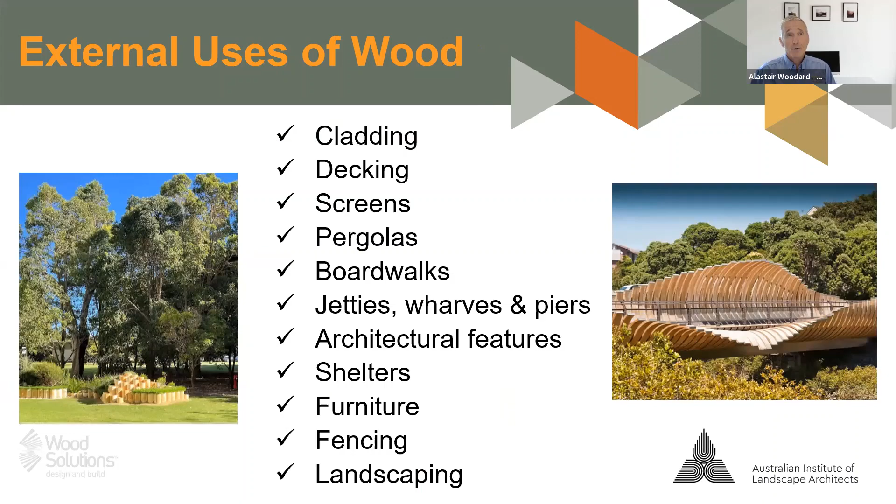This brings us to today's webinar series, which is all about the external use of wood. As landscape architects, you're using lots of wood, whether in the vegetation and trees you specify, or in the range of different wood products used externally. Cladding is a huge market for the timber sector, with beautiful natural products, interesting profiles, including radially cut boards. Wood cladding mixes perfectly with landscape design, giving that biophilic feel with the timber and cladding of the building and the products used within the garden.

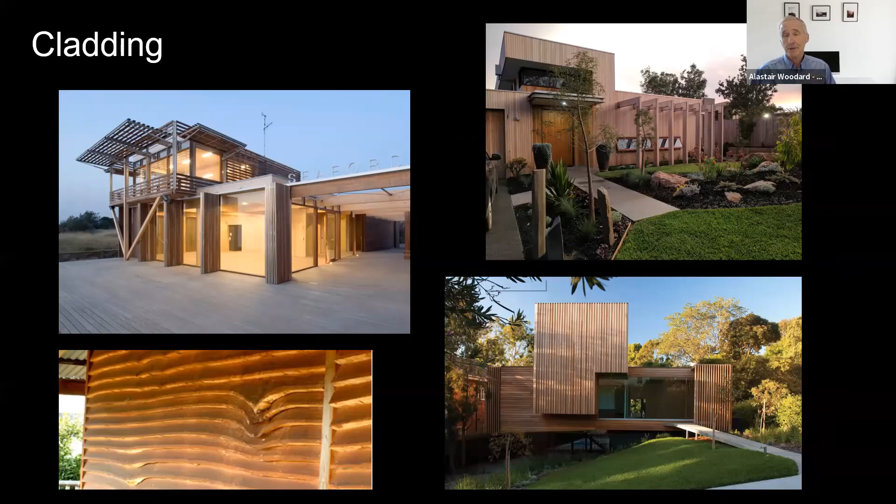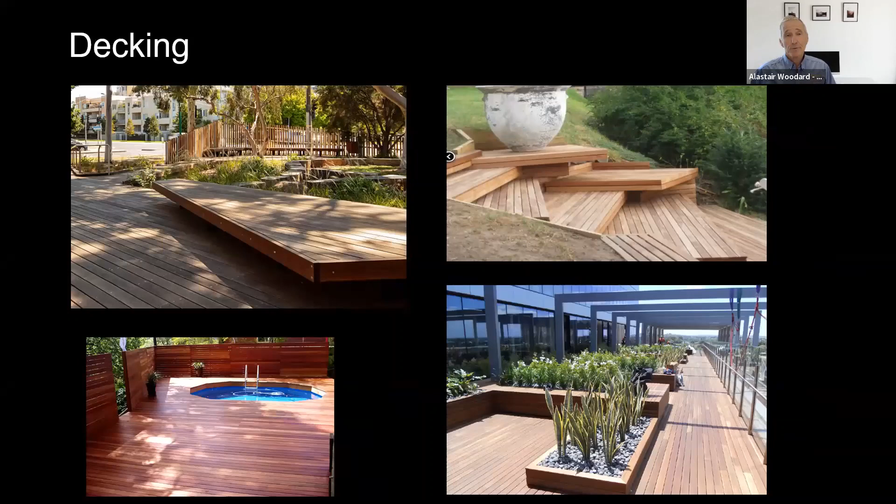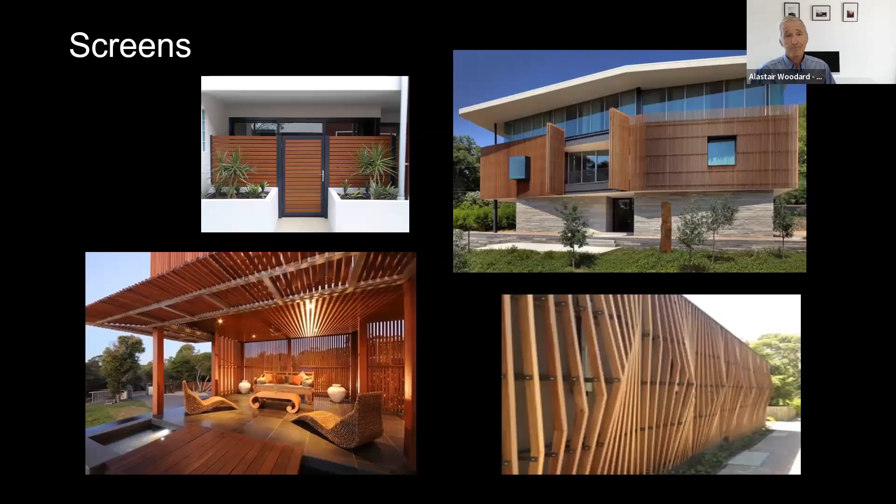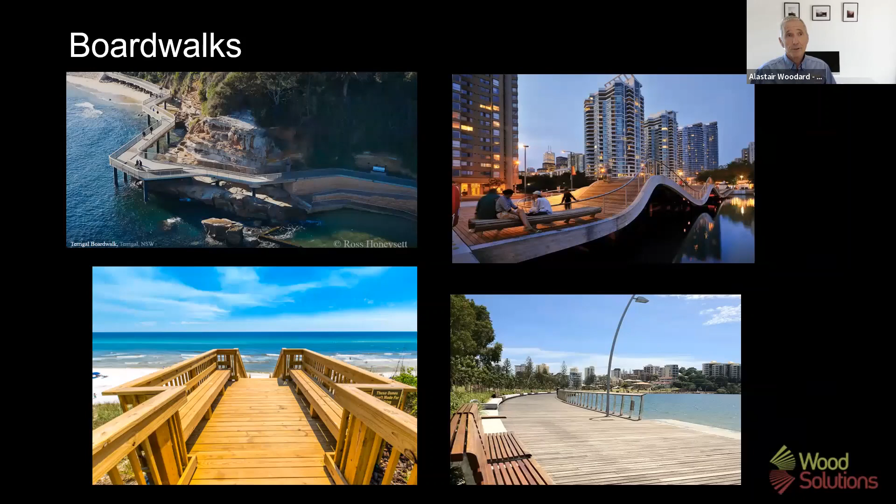Decking is another area landscape architects specify quite regularly, mixing beautiful wood products with natural vegetation. Screens, over the last 10 years, we've seen really take off in the market, both for hiding certain areas and for opening screens to feature ventilation or cover windows. Boardwalks, decks and marinas have always been a major opportunity for durable hardwood products, and we continually see timber used in those applications.

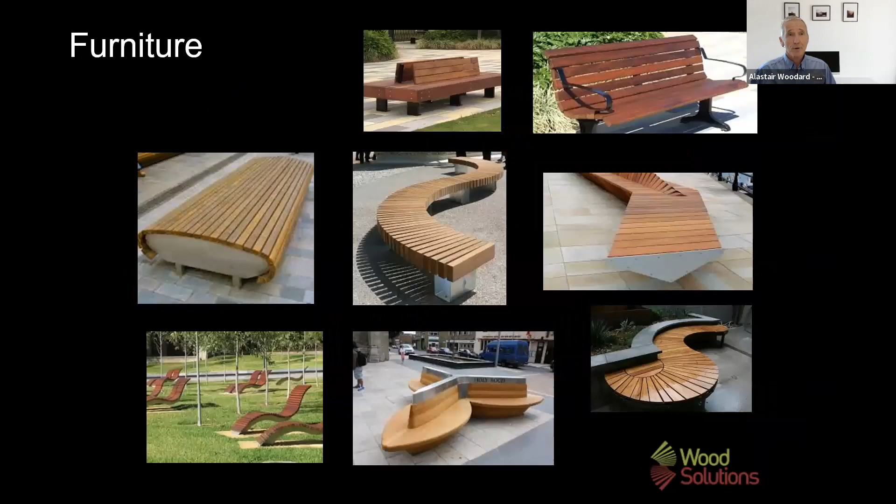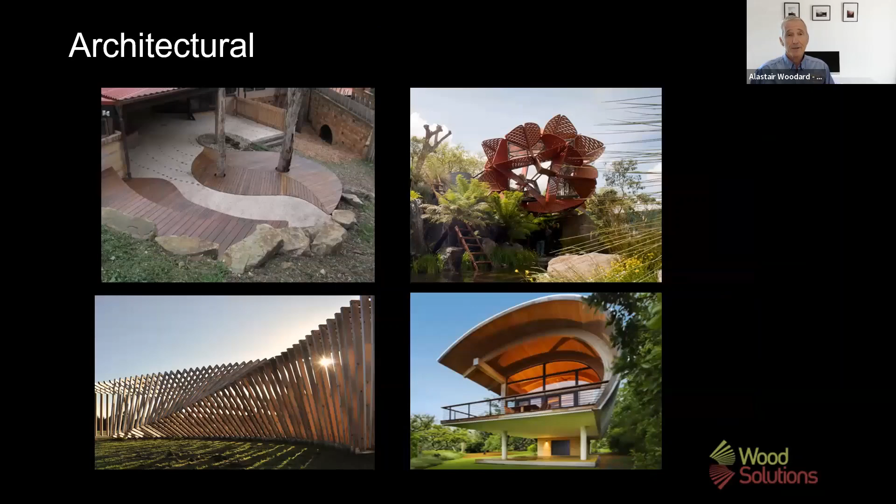More and more we're seeing timber used in public buildings such as shelters, and obviously timber is used widely in different external furniture applications. Some really interesting architectural forms are out there using timber products, and it's exciting to see the innovation in this group. There are also our normal landscaping products like sleepers and fences, and the different types of trees that landscape architects regularly specify.

But all of those things have one thing in common: they all come from wood. It is an amazing material - natural, renewable, recyclable, sustainable, and greenhouse positive. It's amazing when you think about it that wood grows from the air - trees take CO2 from the atmosphere and through photosynthesis break it down, release the oxygen we breathe, and store that carbon in the woody trunk. It really is an amazing material as we move into a low carbon future.

But wood is also biodegradable, so it does break down, and that's a positive thing. It's also something we need to understand and design for when using timber externally. That's really the aim of our series over the next 5 weeks - we want to give you all the information we can about how to specify timber properly, and to set the scene today.

Our first presentation will look at our different forests and the wood products available, and the collective benefit they provide globally as we strive for a zero carbon future. We're very fortunate to have Dr. Fabiano Ximenes present today, Senior Research Scientist with the New South Wales Department of Primary Industries, and a world-renowned expert on wood and carbon. I'll introduce Fabiano with his bio shortly.

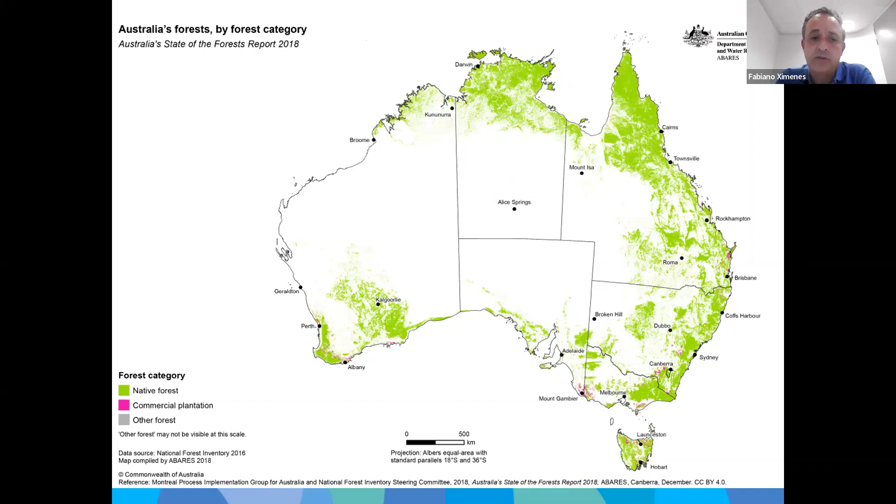It would be a good idea to start with a generic sort of map of where Australia's forests are located. You can tell here that they're largely on coastal areas, and by and large they are native forests, with a small proportion of plantations. In terms of areas, there's a total of 134 million hectares of forests in Australia, of which 132 million, the vast majority, is in our native forest estate. We do have roughly about 2 million hectares of forests in our plantation estate as well.

This fact gets a little bit lost in the general community quite often in terms of understanding what proportion of the native forest estate is actually included in the net public harvestable areas - basically, what areas within that native forest estate are actually allowed to be harvested, and it turns out to be quite a small area. Only about 5 million hectares of that 134 million is actually available for production or management for production in terms of products. Even more interesting is that each year, roughly about 0.07 million hectares of native forests are actually harvested, so it's roughly about 1.4% of the areas that are allowed to be harvested. It's quite a small proportion of the forest estate.

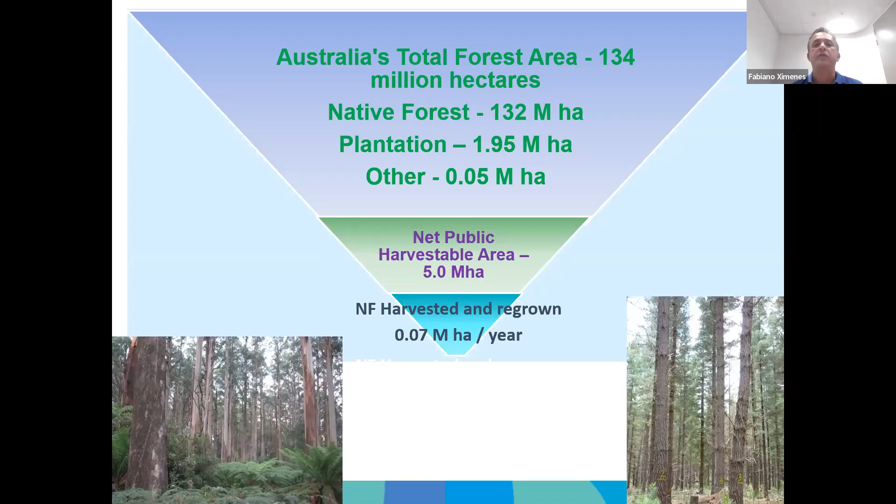The key point there as well is that once those forests are harvested, they are regrown so that they can produce timber for future generations. So that just gives you a bit of a sense of scale in terms of production.

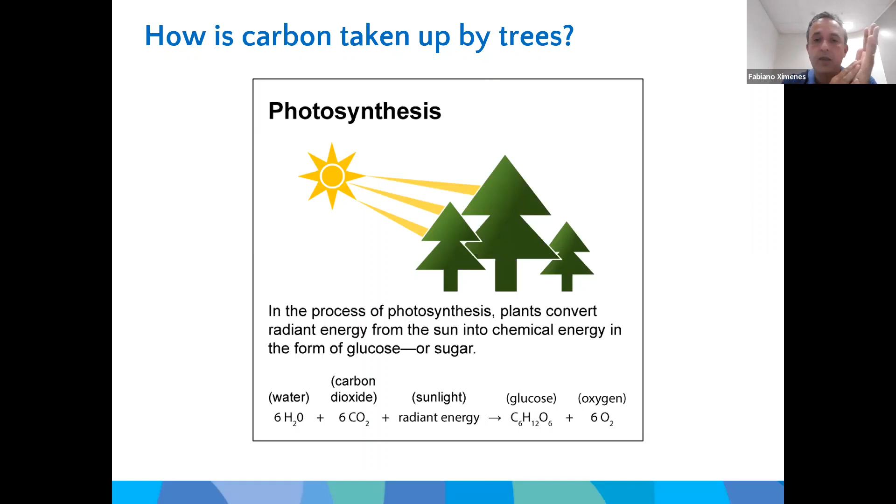Also important to understand, taking back to basics, is how carbon is actually taken up by the trees. As Alastair mentioned, there's a process called photosynthesis, which I'm sure all of you will be familiar with. The point there is that that process really only needs carbon dioxide in the air, water, and sunlight to enable the production of the carbon-containing molecules in the timber, primarily carbohydrates. So that's where it all starts - sunlight, water, and CO2 - and then you get carbon accumulation in the trees over time.

Again, a bit of setting the scene here. There have been attempts at quantifying the amount of carbon that's actually stored in all of Australia's forests. It's not an exact science, but the best estimates we have is that currently about 10.5 billion tons of carbon are stored in our forest estate, in the above-ground portion of our forests. To give you an idea of scale, that's equivalent to close to 80 times Australia's annual net greenhouse gas emissions. So it's a huge reservoir of carbon in our forests, and that doesn't take into account any soil carbon benefits.

The estimates vary, but the best estimates we have is that approximately 11.5 billion tons of carbon is actually stored in our soils in Australia, in forest soils in Australia.

Another important fact to keep in mind is that as trees grow old, the rate of carbon sequestration actually decreases. So the younger the tree is, the hungrier for carbon they are, and the higher the rate of uptake. As the trees grow old, that appetite sort of decreases.

To give an idea of the differences in the rate, a young eucalypt forest, for instance, would be sequestering about 6.4 tons of carbon per hectare per year in Australia. That figure decreases to less than 1 ton of carbon per hectare per year as the trees grow mature, as the forests become more mature. So that's something to keep in mind.

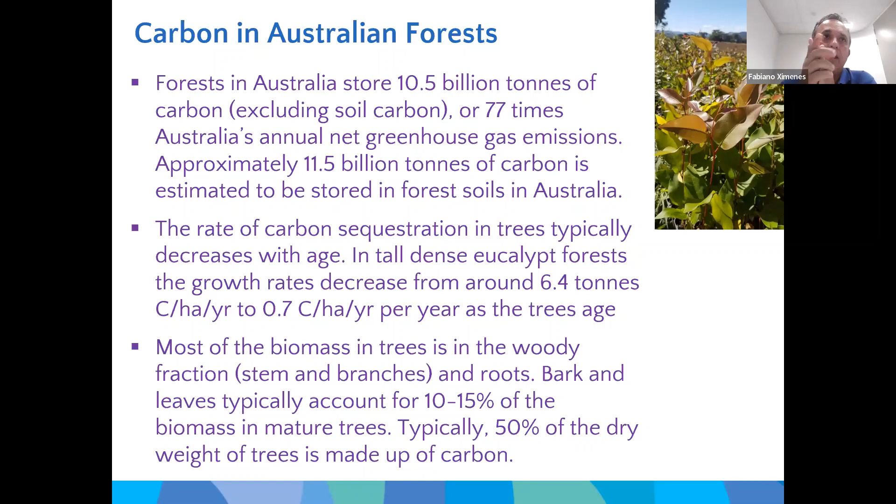How do we typically measure the carbon or the biomass? There are many different ways you can go about doing it. Traditionally, you have information collected via inventory systems. Most forest companies have inventory schedules in place to monitor the growth of trees over time so they understand the final productivity of different forest types. That information can typically be used to predict how much carbon or biomass the forest will have.

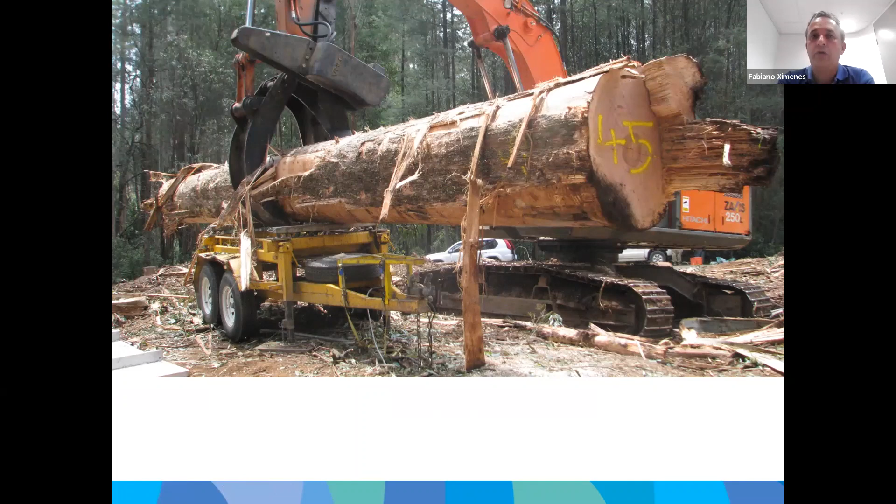That's again showing the trailer in action, weighing crown material, for instance. When you combine measurements of different tree elements like diameter and height with the information we derive on the mass or biomass in the tree, we can start deriving relationships that predict the weight or carbon in the biomass for trees of different sizes. If you weigh enough trees of different diameter sizes, you develop relationships that give you confidence that next time, instead of harvesting and weighing the tree, you can simply measure the diameter and have a good idea of how much biomass and carbon that tree will contain.

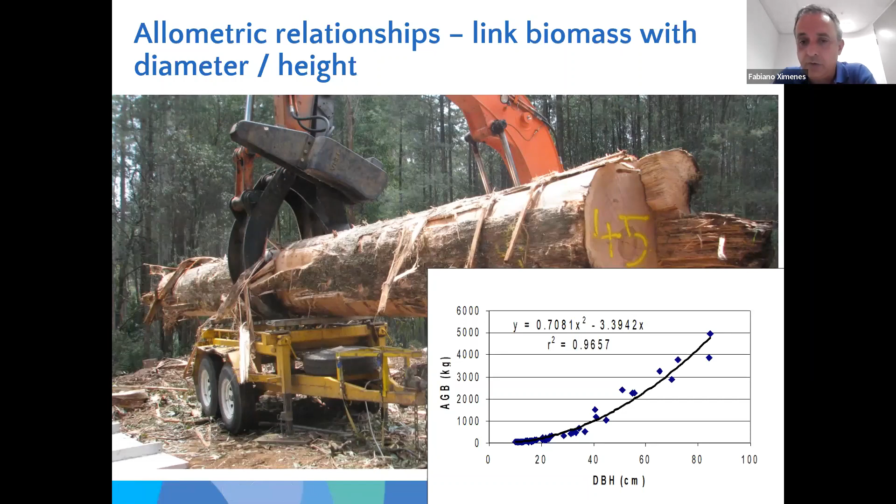A lot of that work is supported by collecting a lot of samples in the field. We collect samples of the wood, branches, leaves and bark, take them back to the lab and do a range of analysis around physical characteristics like moisture content and density, but also prepare samples for carbon analysis so that we can really understand how much carbon those different types of trees can contain.

Now I just thought at this point I'll make a distinction between the key production forestry elements in Australia. So that's primarily based both on a native forest estate, but also based on a plantation estate, right? And there are fundamental differences in the two types of forests in Australia.

From a native forest management perspective, all the native forestry that's done on public estates is managed on a varying harvest and regrowth cycle. So what I mean there is that when they're harvested, there's a commitment to regrow those forests so that they can keep producing timber into the future.

There's a huge variability in terms of those harvest cycles. Typically in Australia, depending on the state, the region within the state, and the species, those cycles can vary between 50 to 90 years. And also there's huge variability in terms of the types of products that are produced from those different forest types.

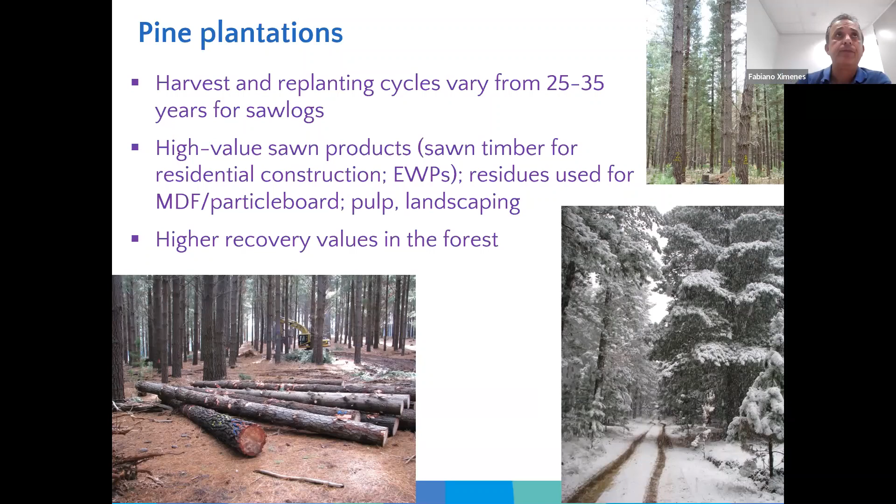And then it's things like environmental plantings. Those are quite often a mix of different native species grown together with the whole purpose of serving an ecosystem sort of environmental need. But they're not used for timber production, so they're much more variable in their composition.

And then you've got mallees, which are normally eucalyptus types of trees. There are over 200 different species of mallees in Australia. They're not grown for typical timber production. They're grown mostly for carbon sequestration projects, but also used for eucalyptus oil production.

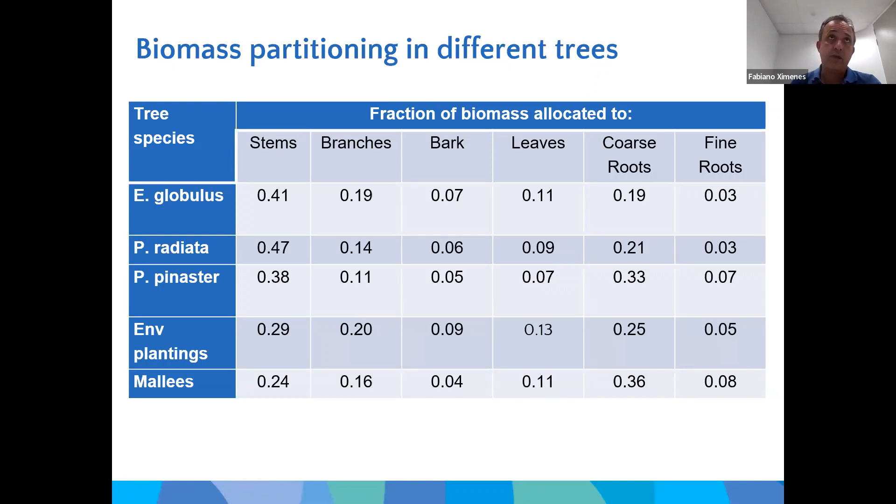And they are quite different to the other species in the sense that a lot of the biomass is actually contained in the root fractions. Almost 50% of the biomass in the mallees is actually below ground, which is significantly higher than for most other species. But as I mentioned before, by and large, for the main types of species in Australia, the majority of the biomass is in the woody materials, so the stems and the branches.

And then we've done a lot of studies as well at harvest, when the trees are harvested, to understand what proportion of the biomass goes to the log products, the commercial logs that come out of the forest, and then what proportion stays in the forest in the form of crowns or stump.

One interesting fact there in terms of what happens to the bark is that in native forest systems, when you harvest the trees, the logs are debarked in the forest because they come off much more easily. So that bark stays back in the forest, whereas for radiata pine and cypress pine, the bark stays with the logs until they get to the sawmill, and they are debarked at the sawmill. That drives a better application for the bark in terms of being used for landscaping purposes as well.

And I guess the other point here is that there is a big difference in the recovery rates for different native hardwoods. If you look at blackbutt, messmate, and spotted gum as some of the key commercial species in Australia, the recoveries there range from anything between 45 to 63%. That's primarily a function of the intrinsic biology of the tree and the architecture of the tree. There are a lot of different factors that drive that, but also in terms of what markets there are locally as well.

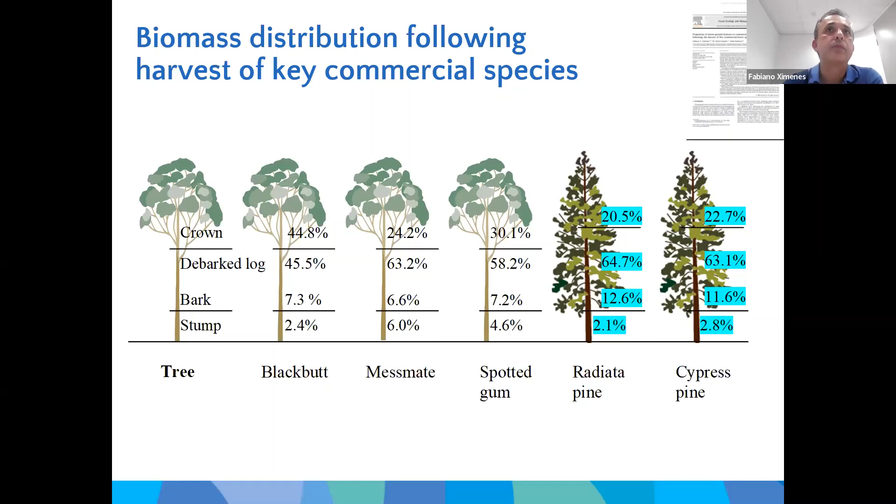Okay, so we talked a lot about carbon in terms of carbon sequestration and biomass and how much carbon there is in different elements. But when we're talking about carbon balance in forests, it's just as important to understand the emission side of things. Where are the key sources of emissions from a carbon perspective in our forest systems?

And as I'm sure most of you would know, bushfires are a major emitter of carbon in Australia. Just to give you an example of how important that is, in our last major bushfires in 2019, the emissions from our forests were about 830 million tons of carbon dioxide in that one year, which basically dwarfed Australia's annual emissions. It was basically twice Australia's annual emissions for 2019.

So when those massive bushfires happen, they have a huge impact on Australia's greenhouse accounts and carbon accounting. But fortunately, one of the key things to understand is that by and large, most of that carbon is reabsorbed by the trees once they recover from those bushfires, within the next 10 to 15 years from the bushfires occurring.

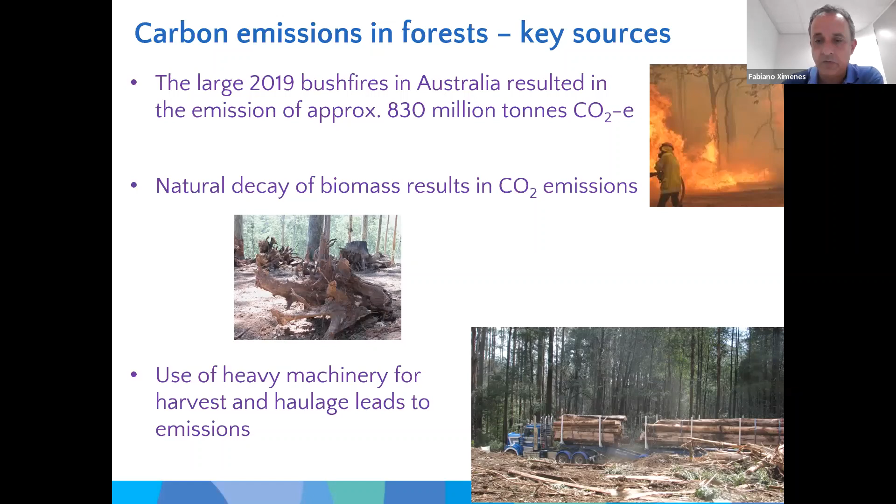Another big element there is the decay of biomass, the natural decay in the forest. So elements that stay behind, branches that fall, or harvest residues, those will decay over time. And also, if you are managing for production, then you will have emissions from the use of heavy machinery for both harvest and transportation of material. So you have to take those things into account.

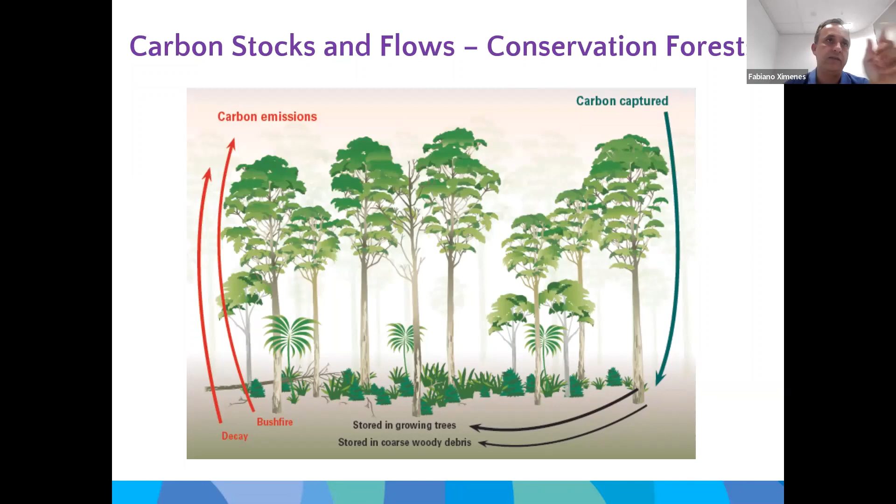And that leads me to a picture where you can combine those elements together. So in your typical national park, for instance, a conservation forest, you do have those dynamics of carbon sequestration in the trees, storage in the woody debris, and also emissions to do with decay and bushfires, as I mentioned before. In our production estate, you do have the same dynamics in play. You do have carbon sequestration in the trees, obviously. You've got bushfires that occur. You've got decay of timber.

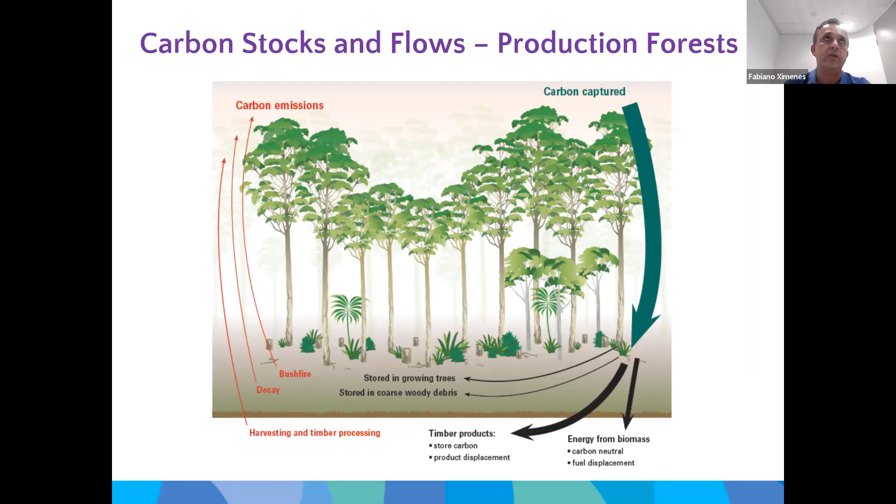But then you have to take into account the emissions related to the use of machinery for harvesting and timber processing. You also need to account for what happens to timber products in terms of carbon storage, and the potential for using some of those residues to sustainably produce energy, which I'll touch upon later. So these are the key elements to think about when discussing dynamics in forest and wood products.

So forest carbon, as I mentioned before, but then what happens to the carbon in terms of different types of wood products, what functions they'll perform, how much, how long, what's the permanence of their carbon in service. And then if they do go to landfills, does their carbon stay in the landfill? And what are the emission reductions if you use timber, which is primarily considered to be a more greenhouse-friendly product than other alternatives? So what can we quantify the benefit to be?

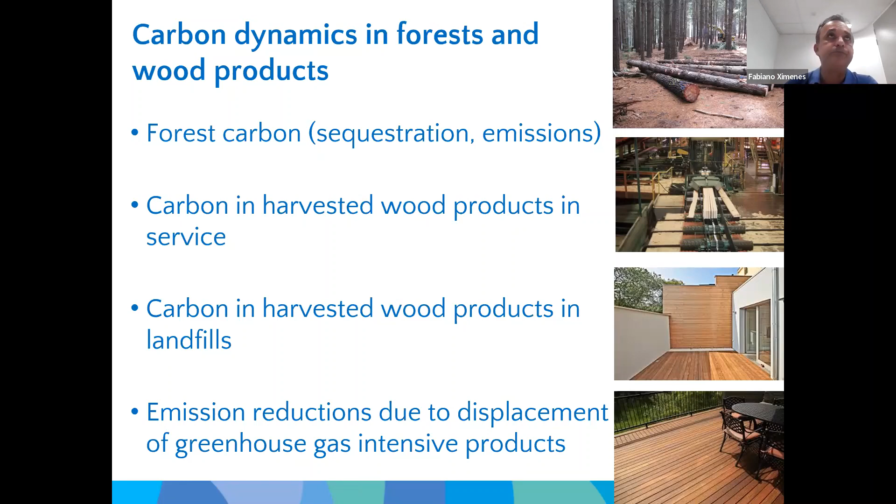Starting with carbon in wood products in service, this picture shows radiata pine being cut in a sawmill and boards produced. The key thing to remember is that different types of wood products have different service lives, and that translates into different permanence of carbon.

The majority of wood products, particularly from pine plantations, is used for residential construction. We've done surveys over time of timber use in houses in Australia, and our previous work suggests that the typical, or mean, service life for wood products in houses is around 45 years.

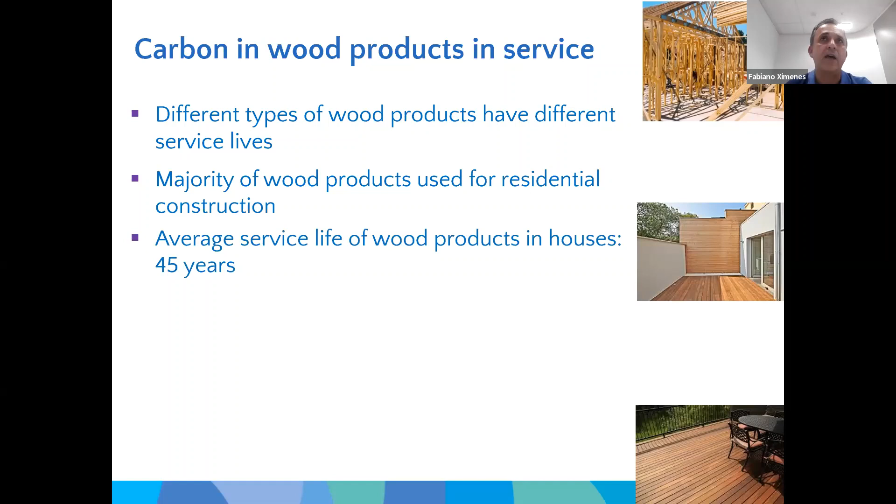When you think about all the timber currently accumulated in wood products in service in Australia, the Australian government actually tracks that in the carbon accounting system, and we are close to 100 million tons of carbon currently being stored in all the different types of wood used in Australia.

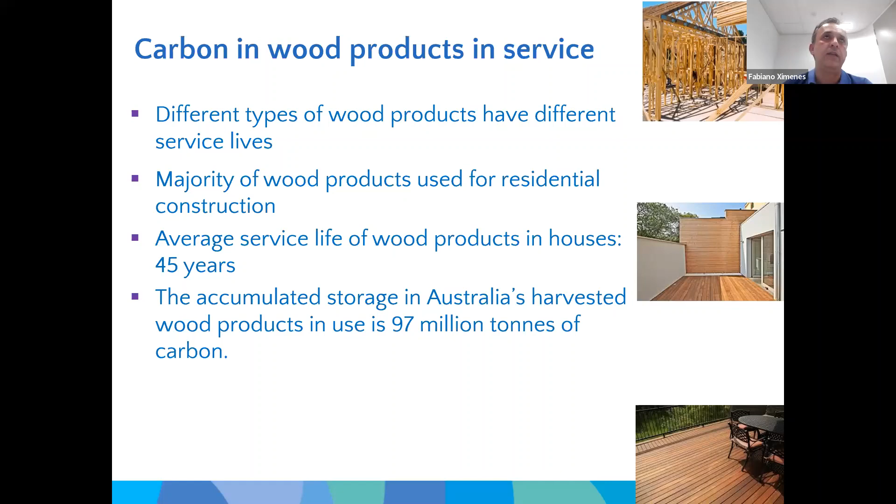There are ways of quantifying what that actual benefit is, and one of them is using environmental product declarations, which some of you may be familiar with. They basically track the fate of that carbon from when the trees grow through to harvesting, processing, packaging, and then getting to the consumer.

So in a nutshell, when you consider how much carbon is actually in the product, in the case of kiln-dried and dressed hardwood, you end up with 1.22 tons of carbon dioxide equivalent per cubic meter of sawn hardwood product, purely in terms of carbon storage. But then if you deduct the fossil greenhouse gas emissions associated with producing that material, and other biogenic emissions besides CO2, you end up with a net figure which highlights the true carbon footprint for that 1 cubic meter of kiln-dried and dressed hardwood.

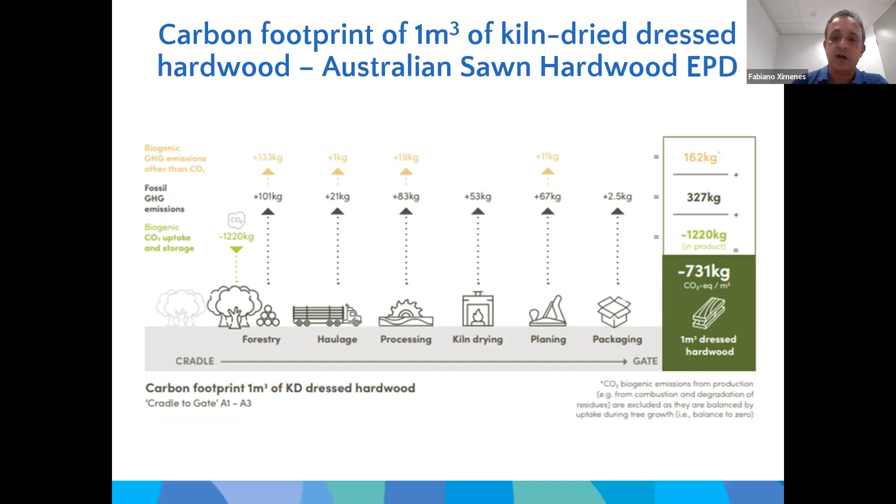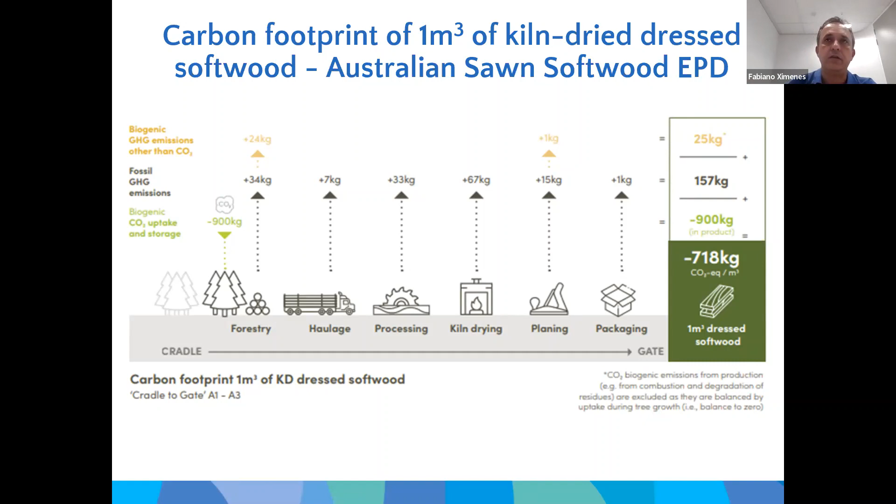Similarly for kiln-dried and dressed softwoods, we can derive a similar picture. We end up with 900 kilograms of CO2 equivalent in the product, per cubic meter. Then when you deduct emissions, you end up with a net figure of 718 kilograms of carbon dioxide equivalent per cubic meter of dressed softwood. If you're interested in finding out more about how this is derived, there's a lot of information on the WoodSolutions website on the EPDs for different wood types.

The difference is that when you produce the energy at the bioenergy facility, that carbon is emitted back to the atmosphere, but this is part of a natural cycle. The carbon dioxide produced is going to be taken up by another tree regrowing on the same spot.

Whereas if you think about a coal-fired power station, that carbon dioxide is emitted, and that's it. It's a one-way street, that coal doesn't get replenished. So that is a key fundamental difference between renewable bioenergy and the production of power or energy from fossil fuels.

And the Intergovernmental Panel on Climate Change recognizes that benefit. In all the predictions about how we can reduce the impacts of global warming into the future, bioenergy plays a huge role in the scenario modeling.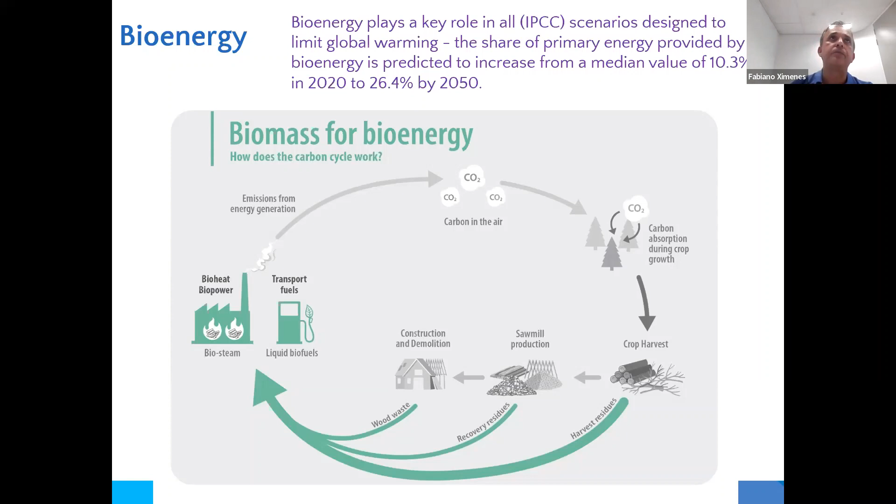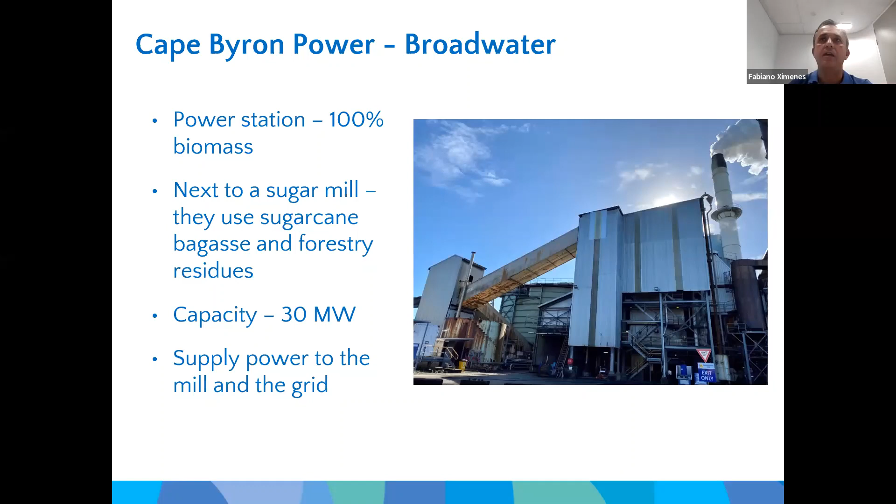I've just got some examples here of some of the biomass that's currently used in Australia for different purposes. There's a facility here in New South Wales where they're 100% powered by biomass, and therefore they are displacing the use of fossil fuels. That's for the sugarcane facility. And there are other things as well which are coming online, really interesting opportunities there.

To combine, for instance, biomass with solar generation, which provides huge opportunities for regional communities, because particularly in Australia, there are so many different areas with really good solar opportunities. If you could combine that with biomass, that provides an opportunity there for self-sufficiency for different regional centres. But I'm not going to spend much time on this, just to highlight the opportunities there in that space.

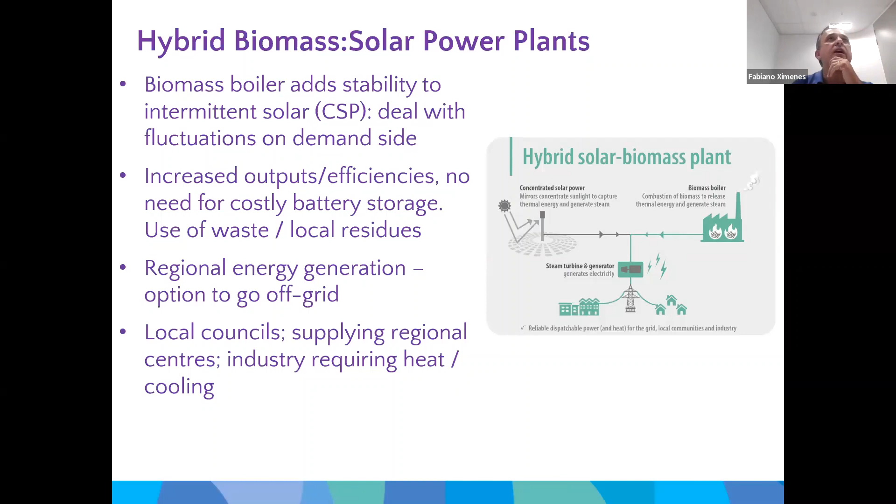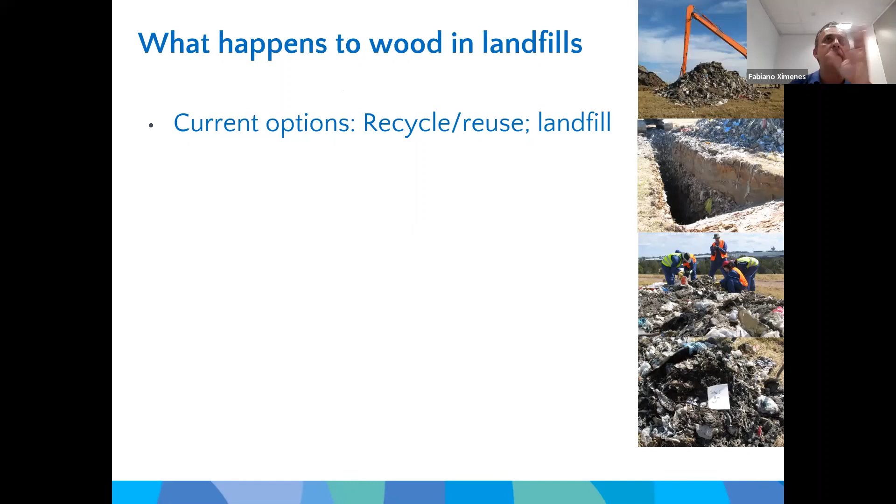Okay, just following the life cycle of the timber, once the products reach the end of their service life, there are two main options currently in Australia: recycle, reuse, or landfill. Unfortunately, a lot of the wood waste ends up in landfills in Australia, historically between 1.5 to 2 million tonnes a year. So if you think about it, this has been happening for decades, it's quite a significant pool of products that we need to account for.

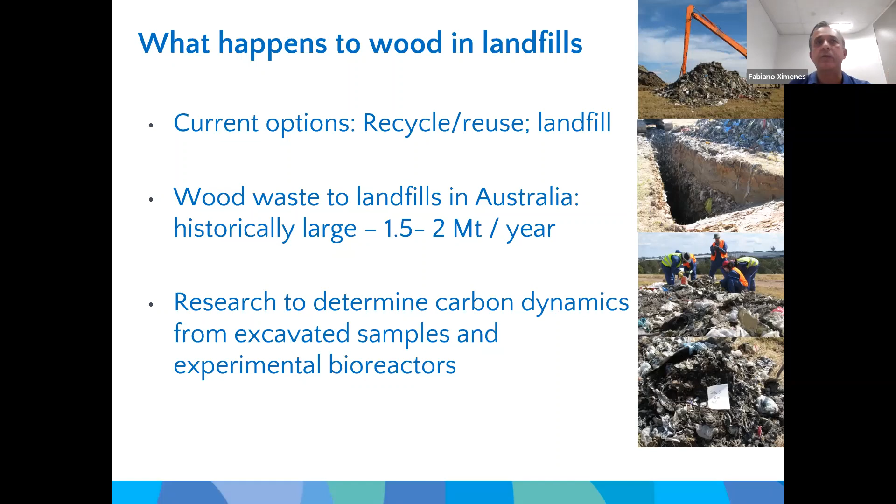So we've done a lot of work, as Alastair mentioned before, to determine what is the implication from a carbon perspective of putting those things in landfills. We've done excavations and experimental work, a total of 9 excavations in Australia, basically to extract different materials and then do a bunch of analysis to determine how much carbon was left behind.

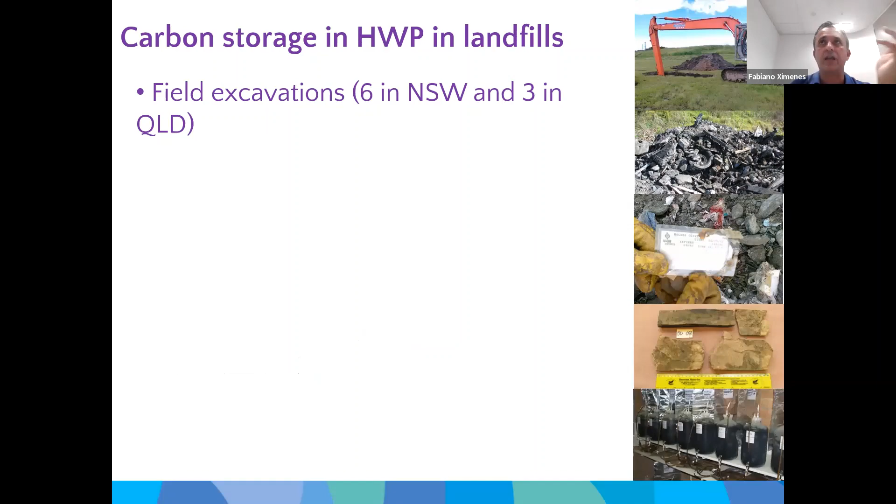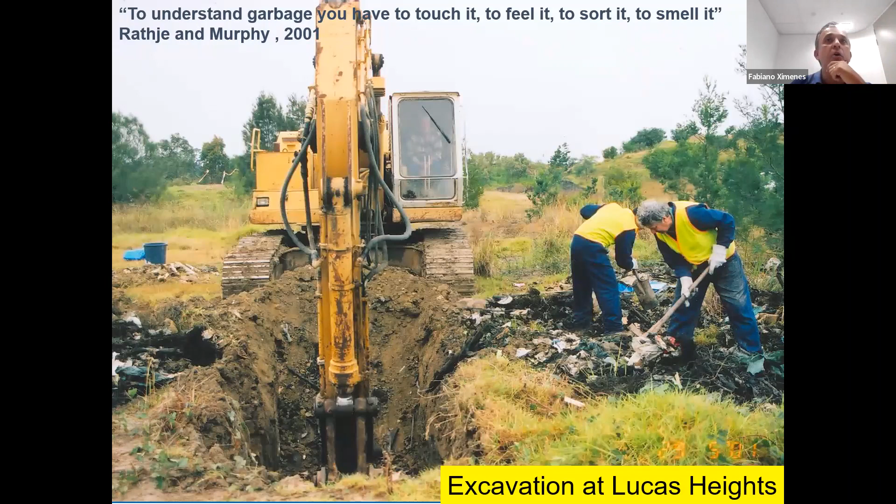So just a few pictures here of some of the work we've done. This is our first ever excavation, a long time ago, at Lucas Heights landfill here in Sydney. And again, not rocket science, it's really about digging a hole and then sorting through the rubbish and separating any wood material that you can find.

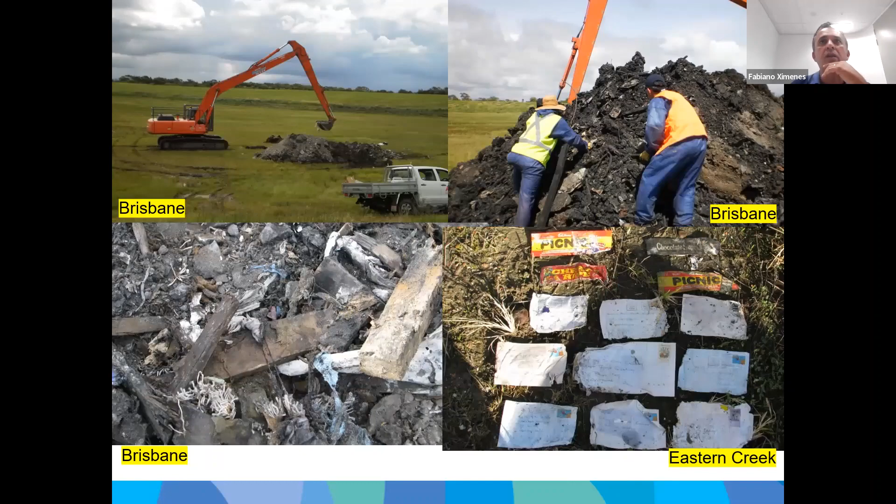Some of the other excavations we've done included examples of different types of products, including paper. Paper after 20 years in landfill, again, it's a very common find for us in terms of coming across a lot of paper in landfills, which most people would have expected to have disappeared quite quickly. In fact, that's one of the ways we actually date how old the material is, how long it's been in landfill - literally by just checking the paper.

Here are examples of the landfill paper on the bottom, and then an equivalent fresh edition, if you like. Similarly, we've gone through a lot of trouble to find replicates of the same type of material that we found in landfill, so that we could compare the chemistry of those different products. And here's a selection of different wood products coming from landfill.

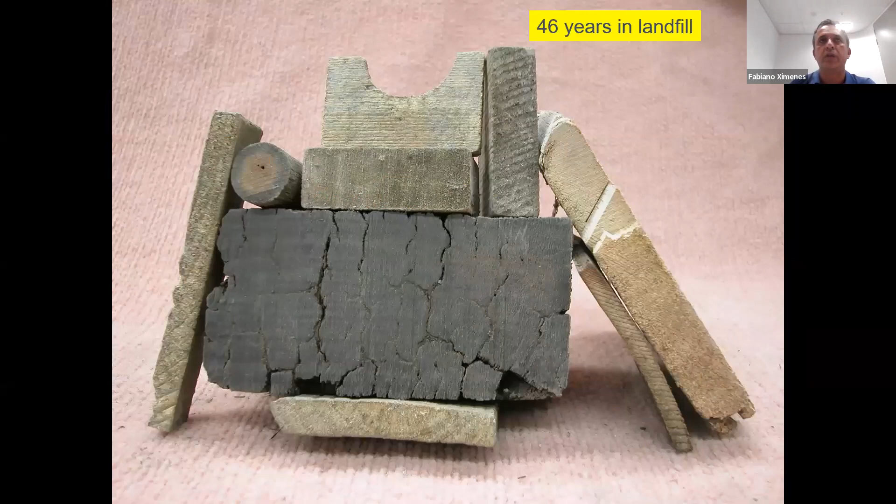In the center there, we've got a section of ironbark, and then radiata pine products around it. You can see the profile is still largely untouched after 46 years in landfill. And things like MDF as well - less distinguishable because the glue over time is leached from the products, but you can still see the different layers of the MDF clearly distinguished.

We've also done a lot of work in the lab, under controlled conditions, to understand how much carbon is actually left behind after you put products in landfills. And I guess, to cut a very long story short, only a maximum of 1.4% of the total carbon in wood products is actually lost from Australian landfills. So the vast majority of that carbon can be considered to remain in storage for the foreseeable future.

And that is primarily because landfills become anaerobic very quickly, which means that oxygen is depleted. That changes the nature of decomposition in landfills from a fungal decomposition mode to bacterial. I'm not sure if you're familiar with bacterial decomposition, but it's a very different mode of decomposition, which is basically very limited in how it can actually attack the wood.

So the combination of anaerobic conditions and the presence of lignin within the wood - those two things together are the key elements making the timber quite resistant to decomposition.

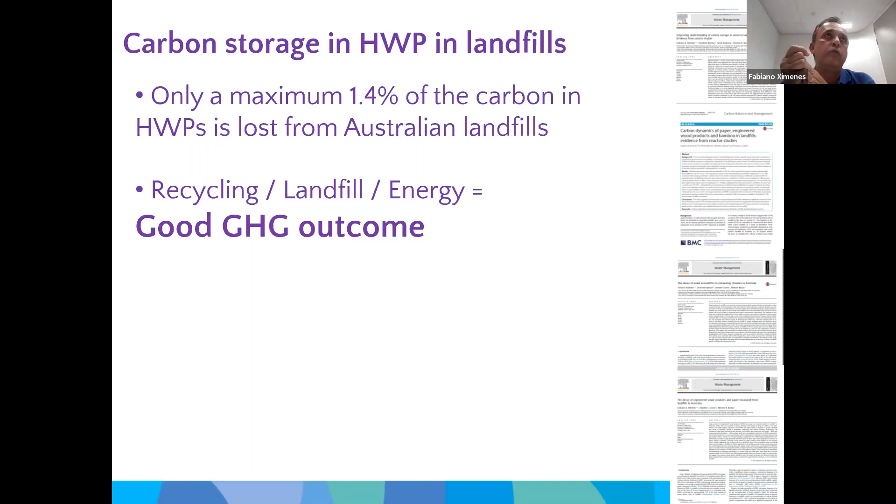So all in all, what that means is that, depending on what happens to the wood product at the end of its service life - whether it's recycled, so that carbon remains in the product as physical carbon. If it goes to landfill, not a great thing from a resource use perspective, but from a greenhouse gas perspective, not a bad thing because the carbon is actually stored. And if it's used for energy and displacing fossil fuels, there's equally a greenhouse benefit there. So for the key disposal options or pathways for timber in Australia, the greenhouse outcome is likely to be good.

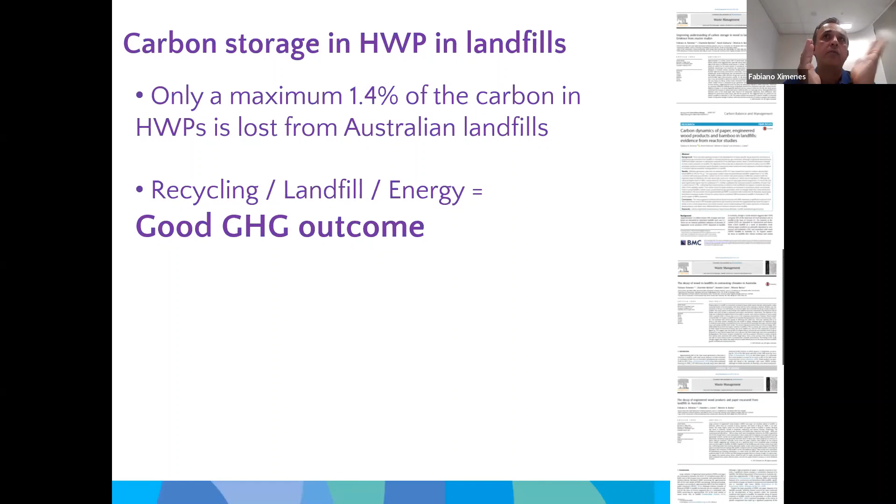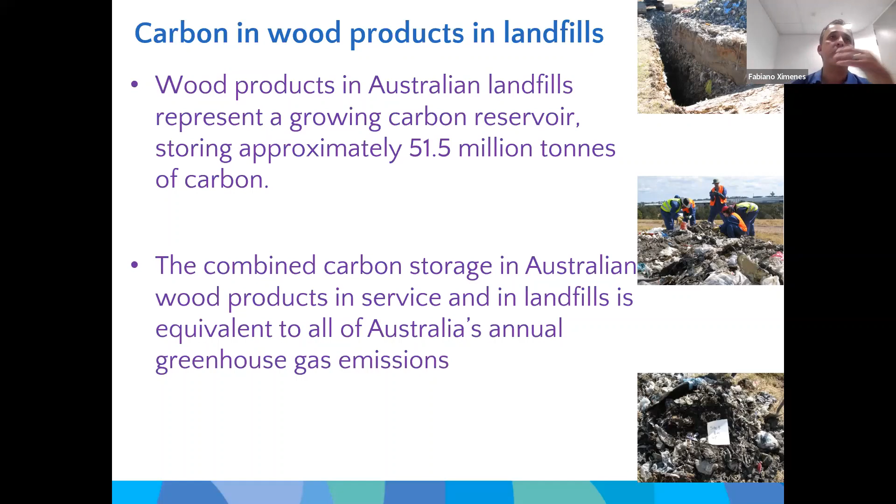When you take that into account, we can estimate what that reservoir of carbon is in landfills. The latest estimates from the Australian government, which used a lot of the research we've done, show we currently have about 51.5 million tonnes of carbon stored in our landfills purely from wood products put in landfills over time. If you combine that storage with what's in wood products in service in Australia, the total combined is equivalent to all of Australia's annual greenhouse gas emissions.

So just quickly moving to the next element here, which is around product substitution - understanding what the implication is of using timber or different types of wood products as opposed to carbon or greenhouse intensive products. Alastair touched a little on that in his initial presentation. The idea is that the combined impact of low energy intensity, being a renewable material, and physical carbon storage, versus alternatives which typically aren't renewable, have high emission intensity, and don't store carbon.

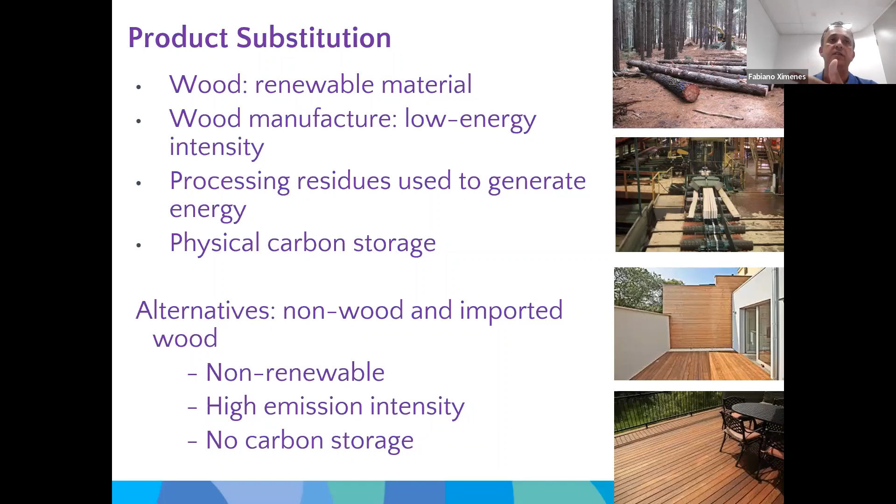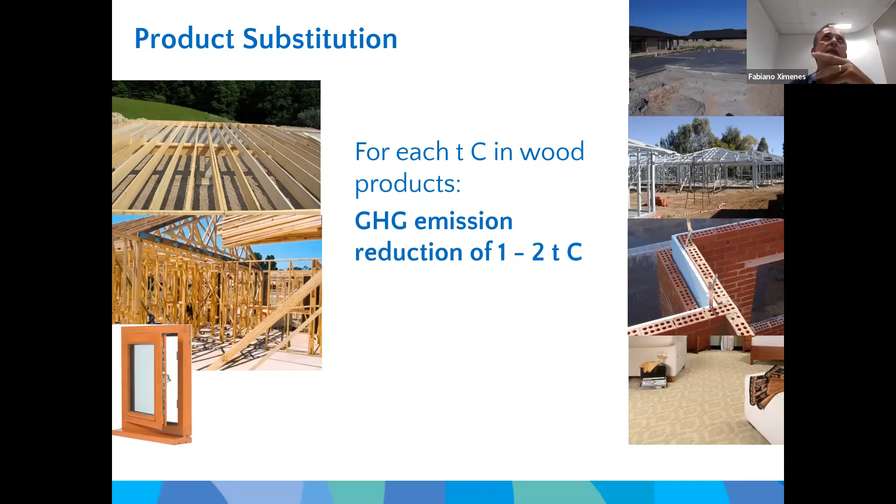When you take those things into account, you can actually quantify the benefit. Typically we can say that for each ton of carbon, say in the framing material or in your decking, there is an equivalent emission reduction of 1 to 2 tons of carbon if you use timber as opposed to other greenhouse intensive materials like bricks or concrete. That's just a way of quantifying that substitution benefit - the fact that you're using a more carbon-friendly material than fossil fuel-based products. This is another way of quantifying that benefit.

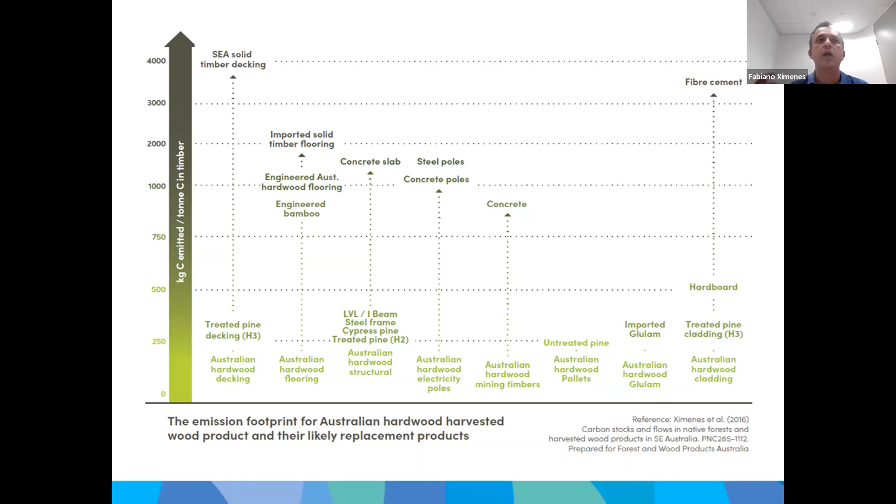Similarly for hardwood cladding, if you look at treated pine cladding compared to hardboard and then fiber cement, you can see the difference in terms of emissions associated with fiber cement compared with treated pine cladding. So it's just another way of representing the benefit.

When you put all those things together into one graph, the dark line represents your conservation forest, and the increasing shaded areas represent the impact of production forestry. Adding up all the different elements that need to be accounted for from a carbon balance perspective, you can see that the production state quickly outgrows the conservation state from a carbon benefit perspective. So this shows the importance of looking at it from a life cycle perspective.

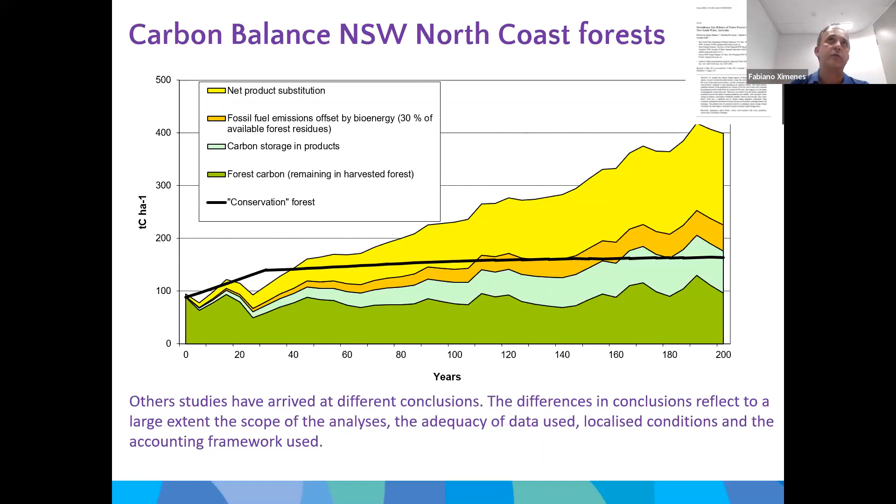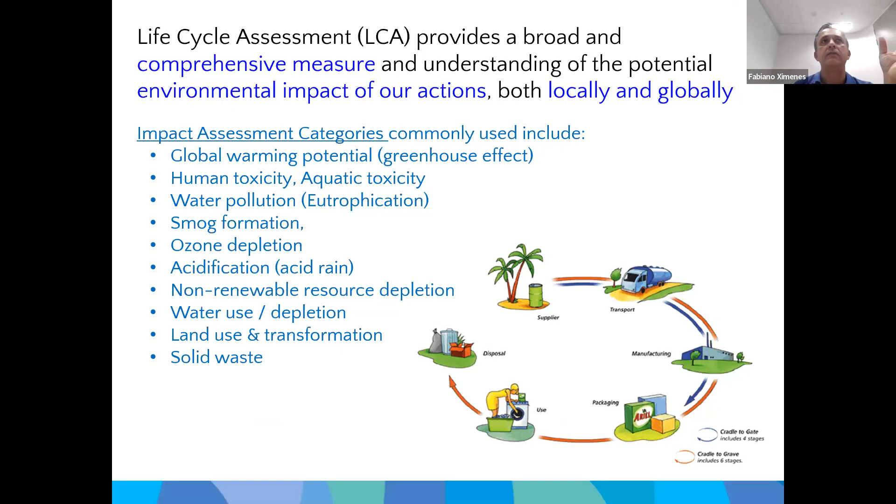But another way of looking at it is using life cycle assessment, or LCA, which is a really neat way to look at the impacts, not just from a global warming perspective, but across a number of different impact assessment categories of a product or production system, ideally looking from cradle to grave. So it's really looking at the environmental impact across the whole life cycle of different products.

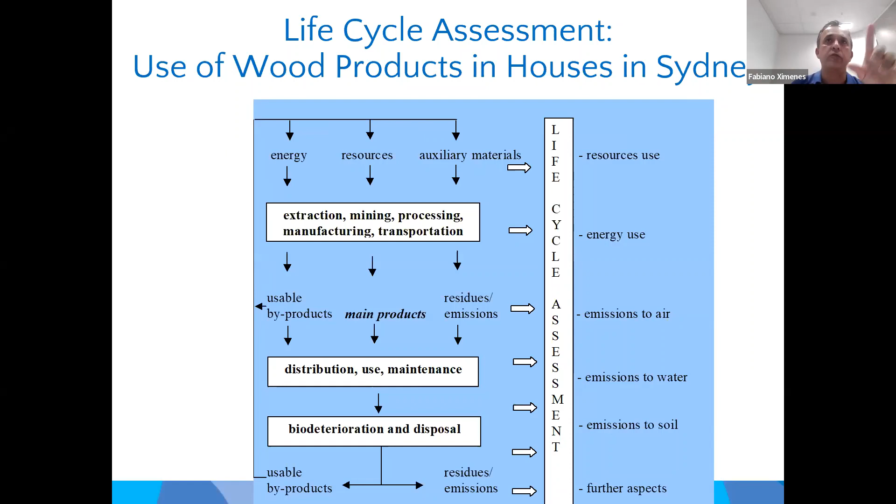I'm just quickly going to show you the results of some work we did as an example of the application of that type of assessment. In this case it was the use of wood products in houses in Sydney, and this shows the boundaries of what was included in the assessment.

The approach was to work with one of the key project home designers, Masterton Homes in Sydney, to get hold of their bill of quantities for two popular house designs. We then varied that to achieve a maximized timber construction option, ran an LCA model, and determined what the greenhouse impact was.

Here's a quick picture of the two different designs we worked with, Affinity and Villina, a single story and a double story place.

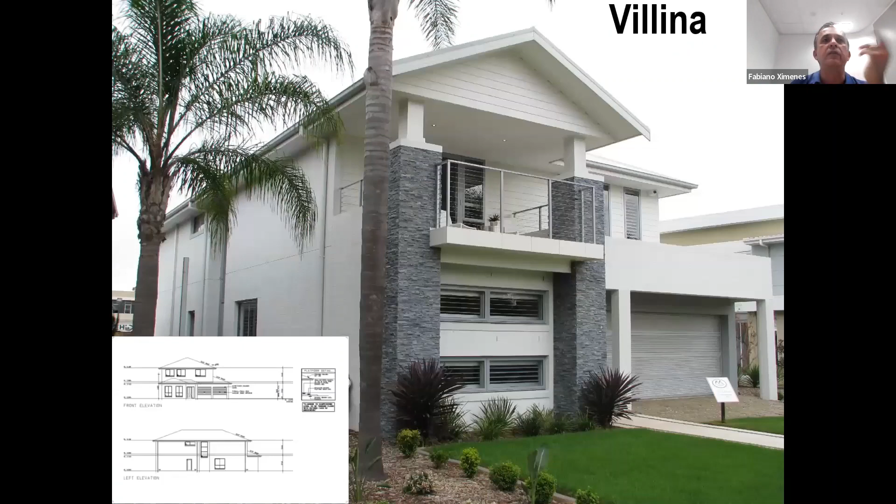Very quickly, some of the results that came out of that work give you an idea of how life cycle assessment outputs look. Here we can see the comparison between using timber and tiles in your house versus carpet and tiles. The higher the column, the higher the carbon intensity, and so the more emissions result from the use of that combination of products.

You can see here how using timber and tiles is virtually carbon neutral, because the negative and the positive are basically equal to each other.

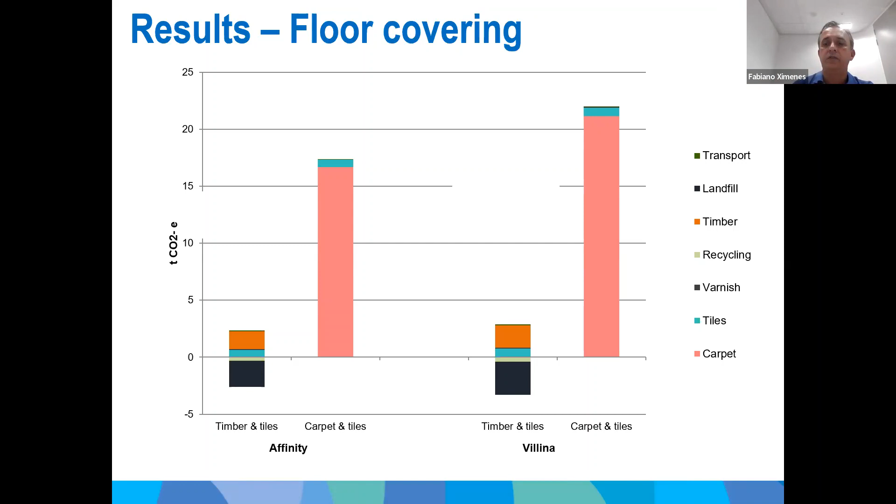When you do that same analysis for all the different elements of the house, you can reconstruct the house and see what the total impact is of designing the house to maximize use of timber, versus your typical design which doesn't maximize use of timber.

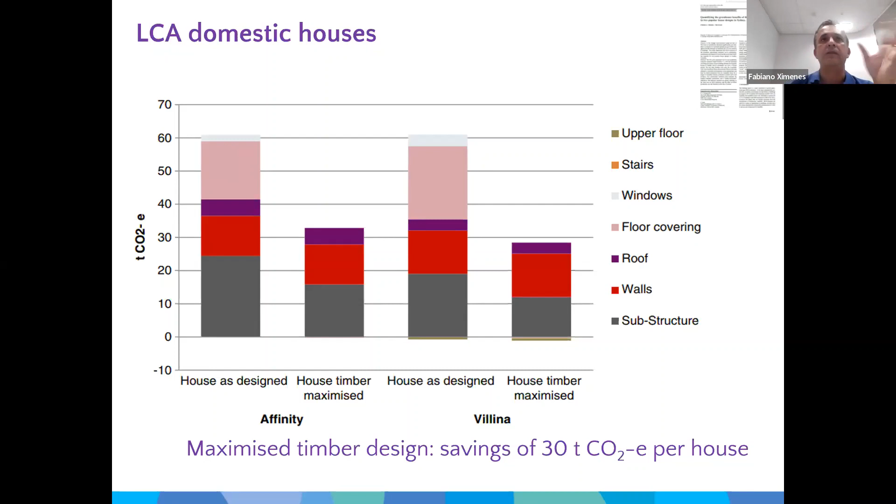In a nutshell, if you go for the timber maximized design, on average you get a saving of about 30 tons of carbon dioxide equivalent per house, which is significant.

That gets translated into another opportunity for the industry, which is to realize some of those carbon benefits through the National Emissions Reduction Fund.

When you grow plantations in Australia, depending on the circumstances in which you're planting your trees, you may be eligible to claim carbon credits. That includes both carbon in the trees as well as harvestable products, and you have to take into account emissions related to harvest and transport, use of fertilizer, fire, etc.

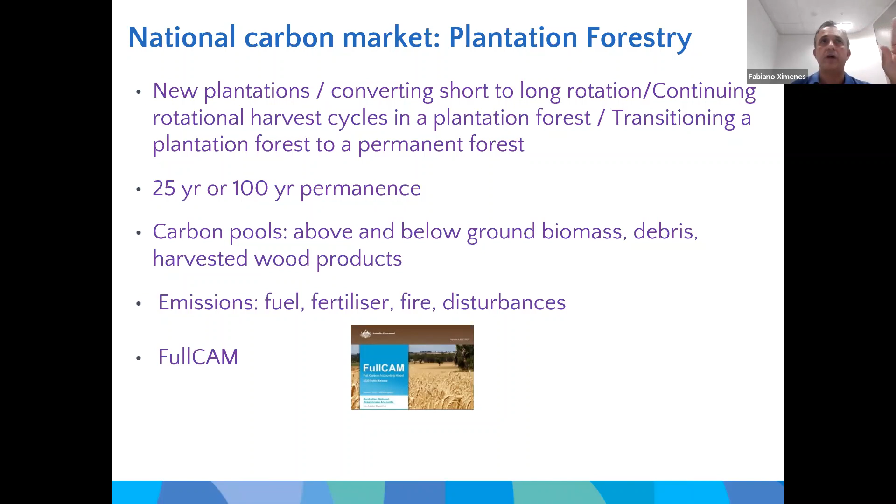So forest growers have access to this as an option, and there's more information here if you'd like to look into it.

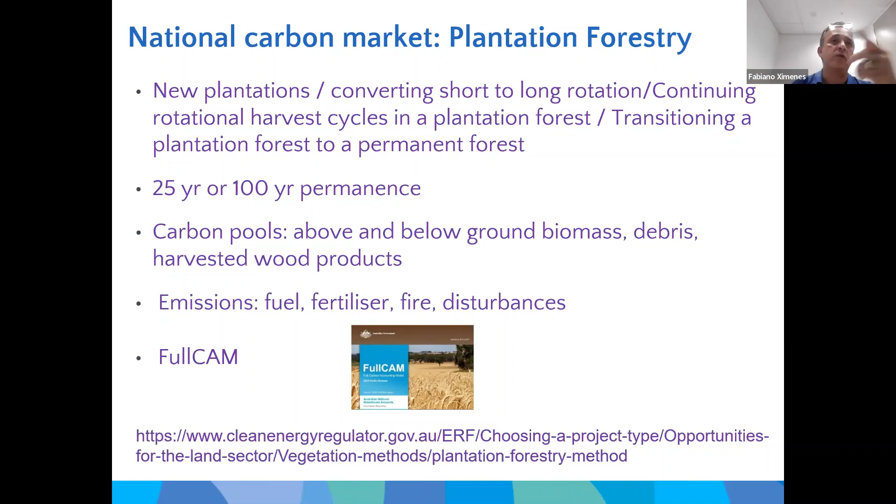Quickly, in the built environment, there's no example of this in Australia yet, but overseas there's a scheme that rewards the use of timber in construction, the Puro Earth bio-based materials methodology. If you're interested in finding out more, you can go to their website, which has a lot of information on how it rewards carbon storage in different wood products in buildings.

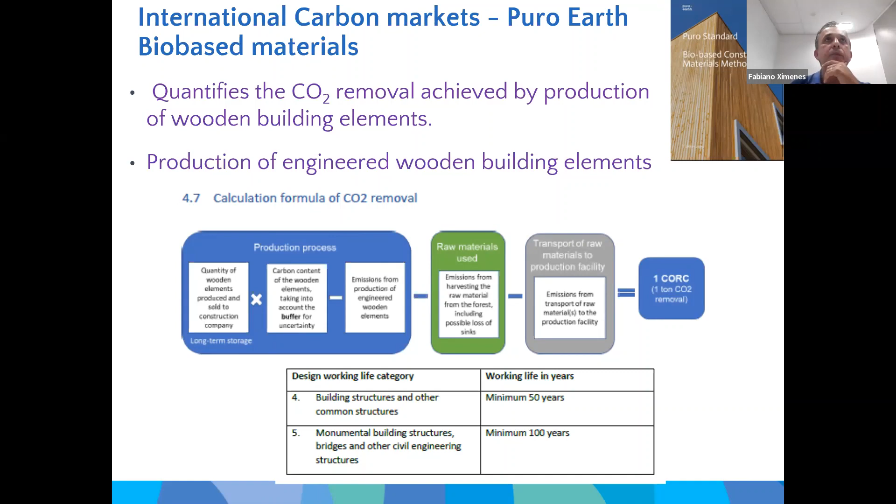Finally, just to highlight that as the use of fossil fuels in the world becomes much more limited, in a lot of cases the natural replacement is a biomass-based alternative.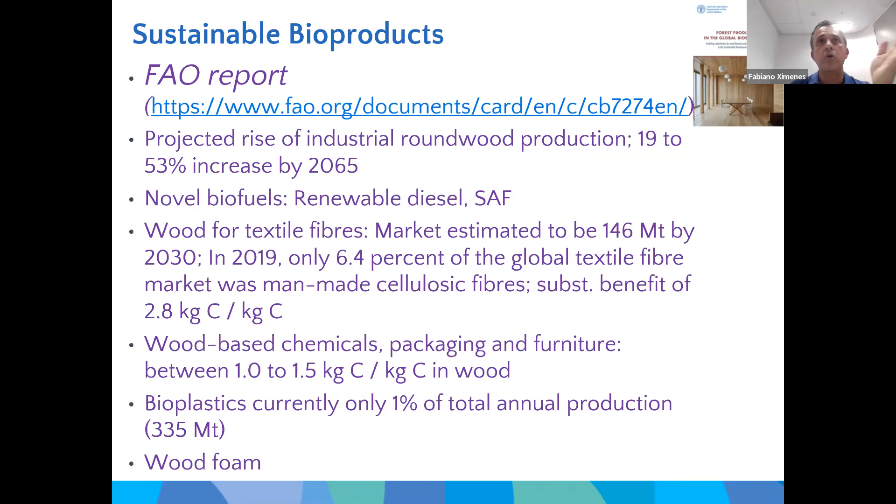And that will create a huge market, particularly for those residues that I mentioned before, which are inevitable from a forestry perspective. So that's just to highlight some of the really exciting new innovative uses for that biomass, including bioplastics, replacing jet fuel with bio-based fuel, wood-based chemicals, and textiles. There's a number of different markets predicted to grow, and a lot of them will be fueled by biomass from forests.

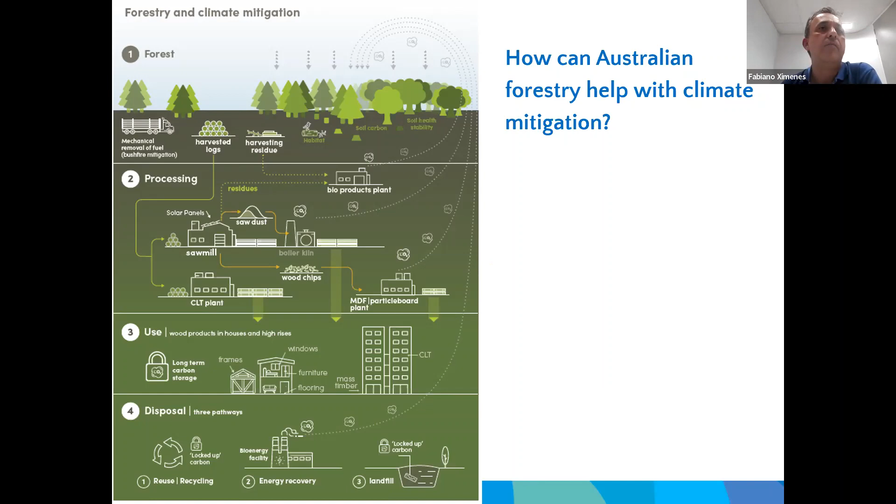And I'm just going to leave you with this diagram, which basically tries to encapsulate virtually everything that I talked about in my talk, trying to demonstrate how forestry in general can contribute towards better climate outcomes. So I'm just going to leave you with that, and with this, I'll thank you for your attention.